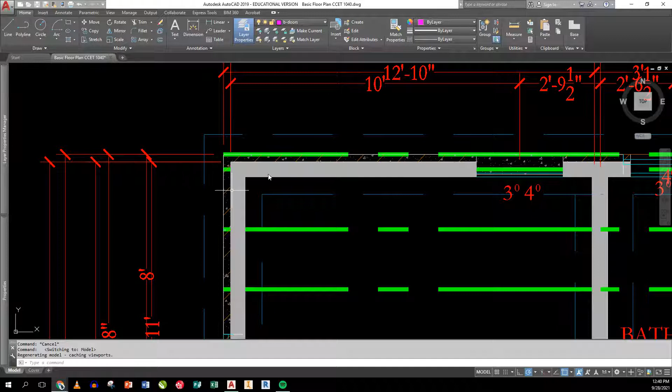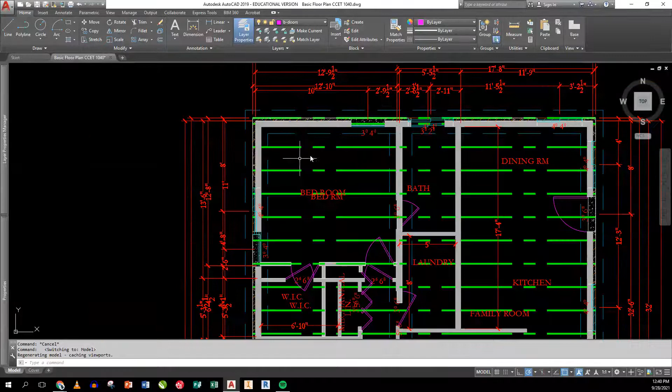And then you can see my footings going around, and you can see the difference in my concrete dimensions, where they've got to be poured to, as opposed to my wall dimensions, where the framing's got to go to. Those are kind of important notes to have on your plan. In the end, since the wall here is dimensioned to the wall, not to the brick, it actually makes the foundation ever so slightly - about 6 inches - larger than the main floor.

But what we want to do is this. Once we get to here, we got to start talking about how we're going to organize our drawings. In our template, we start with a basic cover sheet that's just a blank sheet in our cover page. So this is paper space as opposed to the model space right here - we've got model space here, paper space here.

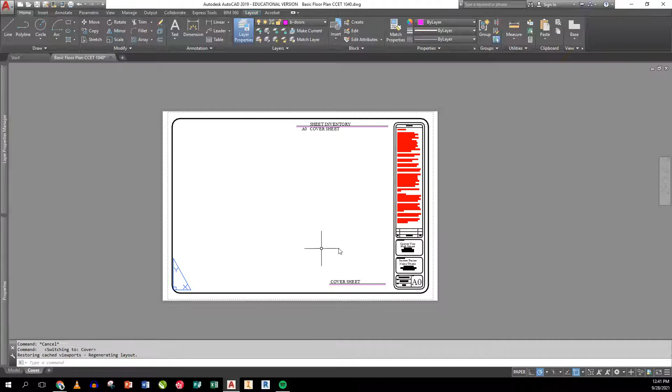So as I start plugging these things in, how do I make this all work for us? You've got a couple options here. I'm going to right click on this, go to move or copy, and copy. It pops up a little window like this. I'll make a copy and hit OK. So it just made a copy of the cover.

I can reorder them by literally just dragging them. I can also rename them by right-clicking and picking rename. In my world, this would be front elevation. All right, so there's that.

And I would say, okay, now what do I do - I have to rename this, I have to renumber it. Later on, we'll show you how to set up a whole bunch of attribute tables so it actually fills a bunch of this stuff in with attributes automatically. But for right now, let's hold to this. So that's how I would make each page.

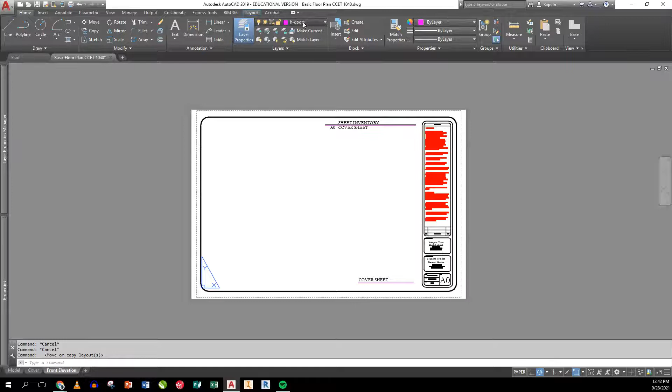Now here's the trick. I'm going to go up here and pull this down right here - got to click on this slider bar. I now have down here a window. I'll turn off that, and that is my window looking into model space. That window is literally a box that marks where I look into the model space. So consider this like a template I'd put on a window, and this is the actual glass area I'm looking into my model.

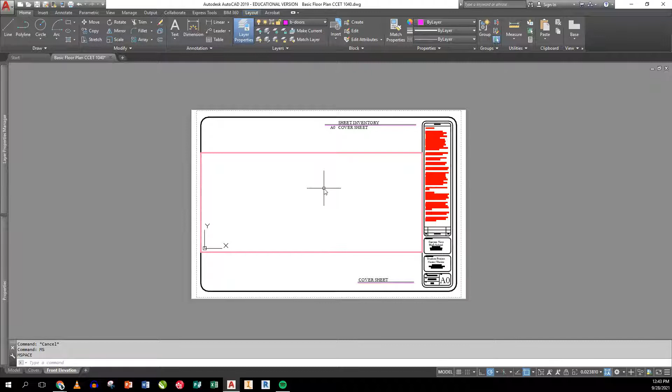Now if I go MS here, see how it highlights - that's the color of its layer. Remember I told you those pink layers are my no-plot layers. So I can see in now, and my UCS just changed shape. If I go Z enter, E enter for extents, it's going to zoom me to everything there. Now I've already got some template pieces here, some manufacturer's details, but there's my floor plan right there.

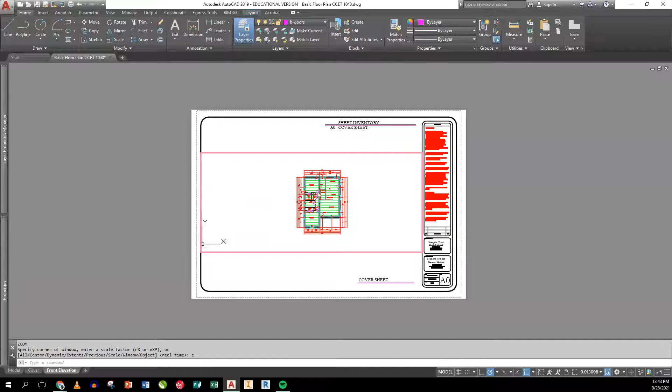Now I'll zoom in on my floor plan, just moving my cursor over it and rolling in like normal. Now let's say I want to set it to a specific scale. Well, how do I set a scale? In this case, I type Z for zoom, enter, and do a ratio, 1 to 48, and that's XP, reference to paper space. It hardly moved because I was really close as it was.

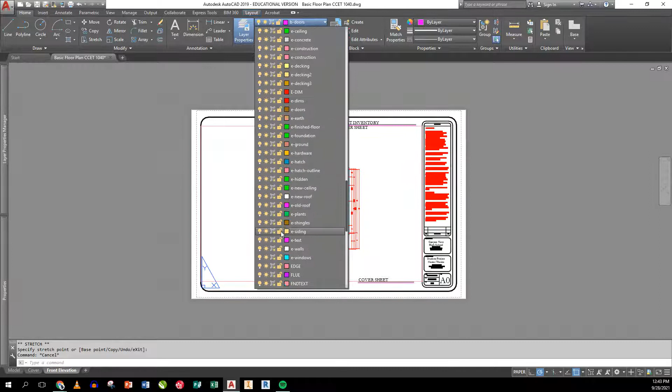So if I go back to paper space here, I can actually change the shape of my paper space window to allow for that to be completely seen. Now, if I go back up here and turn it off so I can't see my paper space window, all the way down here, hide that. And I'm going to freeze it in new viewports. That's it, that's all it takes. So I can see it.

Now here's the trick. MS. Notice I can see everything here. I don't want to see everything. So I'm going to right click - actually, let's do it over here on my layer properties manager. Check this out.

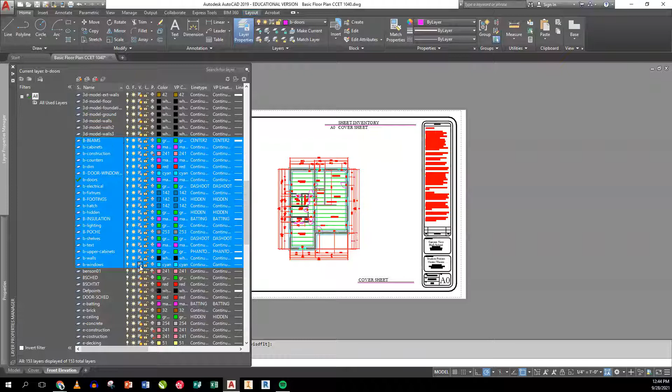I'm going to go over to my property manager, click right here on beams, go all the way down to the bottom of my B layers, which is right there. And I'm going to freeze this in current window, which is this tab with the little sun icon. Then when I click back off, see what I mean? It's gone. So if I go PS, my cursor changes back to a paperspace UCS marker, but all my floor plan, all my basement foundation floor plan is now hidden. I'm only seeing the ground floor. That's what we want to see. That's correct, so that's where we want to go with this.